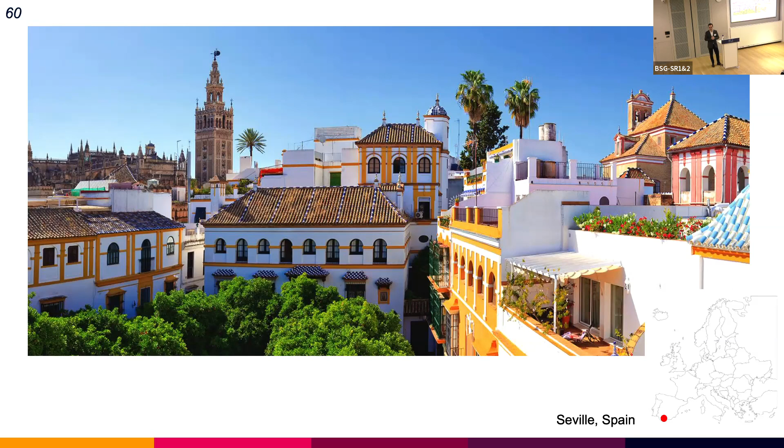I would like to start talking about where I come from, because I am from Seville, Spain, a lovely place with amazing food and fantastic weather, but with last summer reaching more than 45 degrees. I think we never saw that before. This is because the way that we understand cooling is changing.

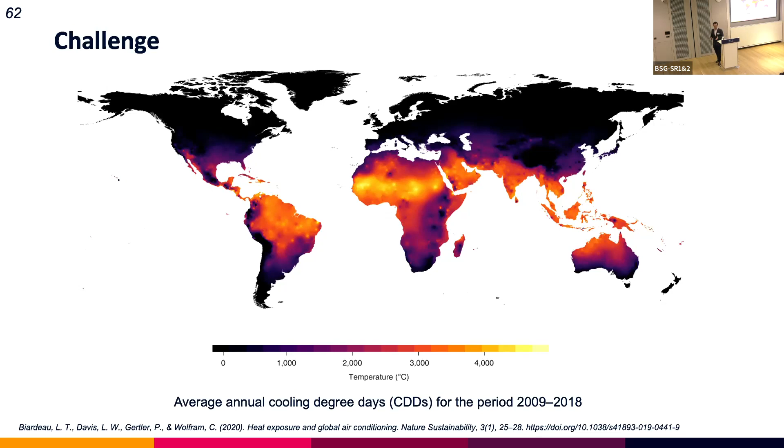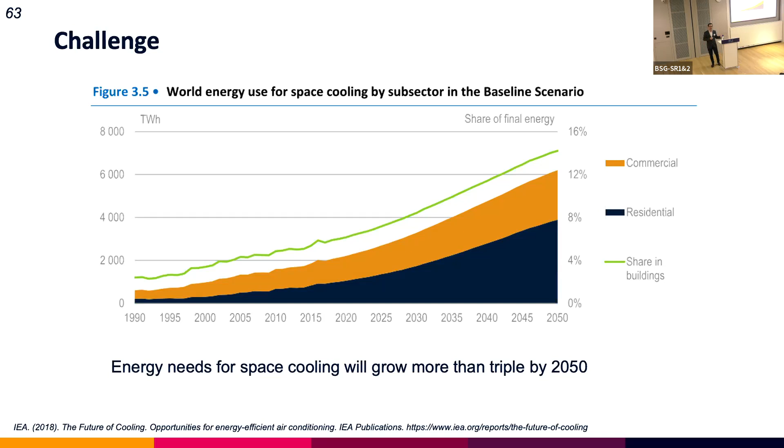Global warming is increasing temperatures globally, and heat events will occur more often and last longer. It's expected that the energy demand for cooling will grow by more than triple by 2050. Even in the UK, it's expected that more than 75% of households will have air conditioning in their houses by the end of the century. So to face this challenge, we need to start thinking about adaptation and not only about mitigation, in order to increase the heat resiliency capacity of our cities.

What is heat resiliency? We can define heat resiliency as the ability of buildings and the system to continue functioning as intended in the face of heat stress imposed by climate change.

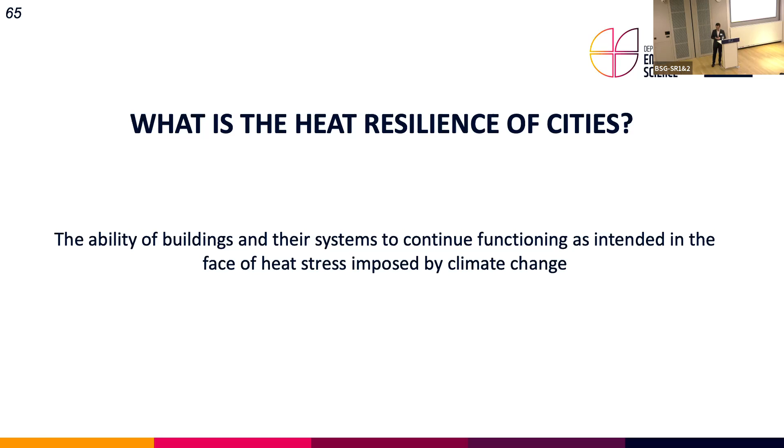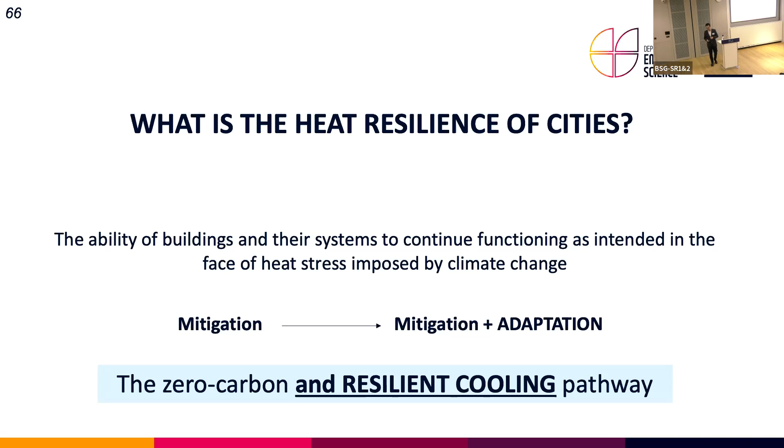In this case, we can find well-oriented policies focusing on energy efficiency and the net zero carbon pathway. But here we are not considering any adaptation pathway. Even most of the time, we are creating some barriers or trade-offs to promote this adaptation. So in this presentation, I will show the different steps that we should promote in current building regulation and building design in order to improve this adaptation pathway.

They are related to heat dissipation, heat modulation, and solar and heat prevention in the built environment. Let's start one by one.

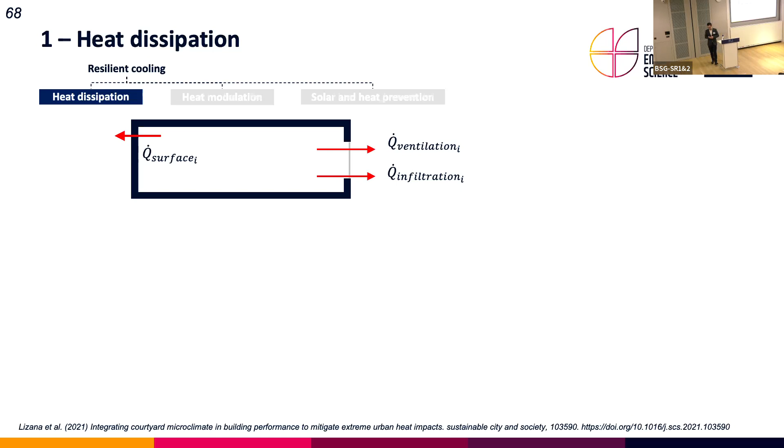Heat dissipation means the way in which we can reject heat from the indoor environment, from inside to outside. This is something we can do through the building surface, through ventilation, or through air infiltration. Right now, current policies are focusing on energy, assuming that in all buildings we have ventilation and a heating, ventilation, and air conditioning system.

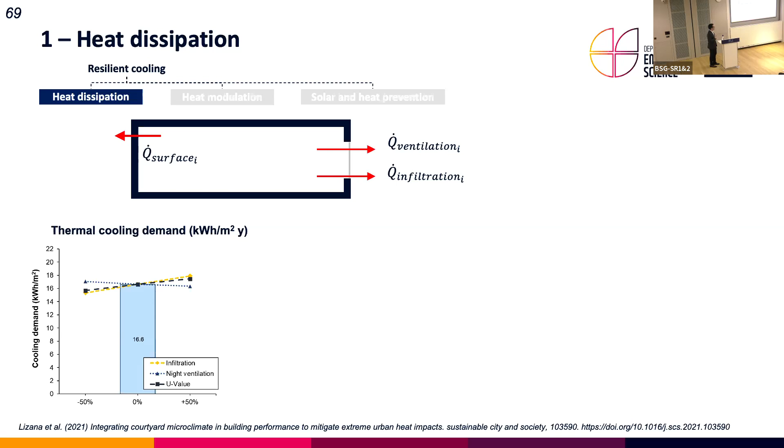From the energy point of view, when we evaluate these solutions to reduce infiltration and improve the insulation of the building, we are decreasing the energy demand, in this case for cooling, which is fair.

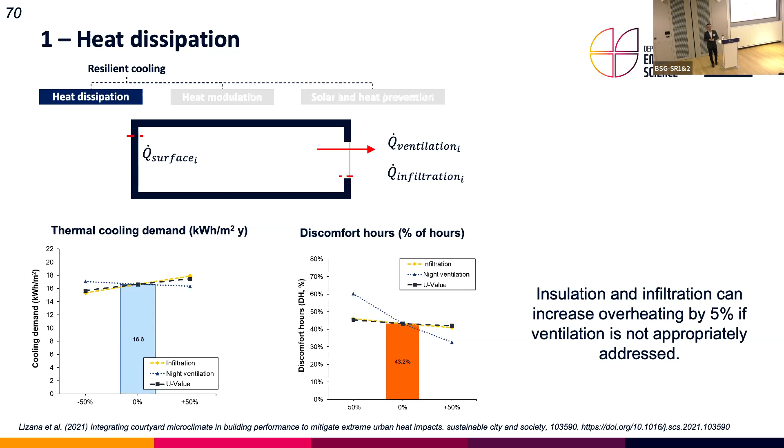However, when we evaluate the same solutions from the point of view of discomfort, in cases where we don't have air conditioning, we can see the same solutions increasing the discomfort hours. Discomfort hours meaning the percentage of time in which our building has a temperature above a threshold, for example above 27 degrees. So by promoting insulation and infiltration control and not promoting ventilation, we are increasing overheating in our buildings by up to 5%. Of course, ventilation is an option we can promote to solve this problem.

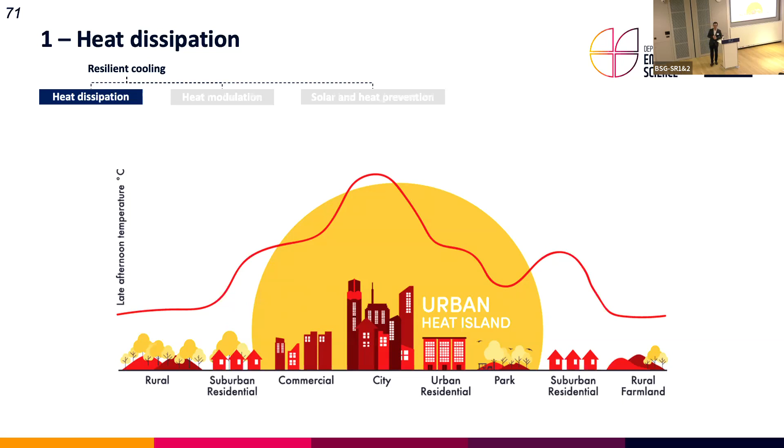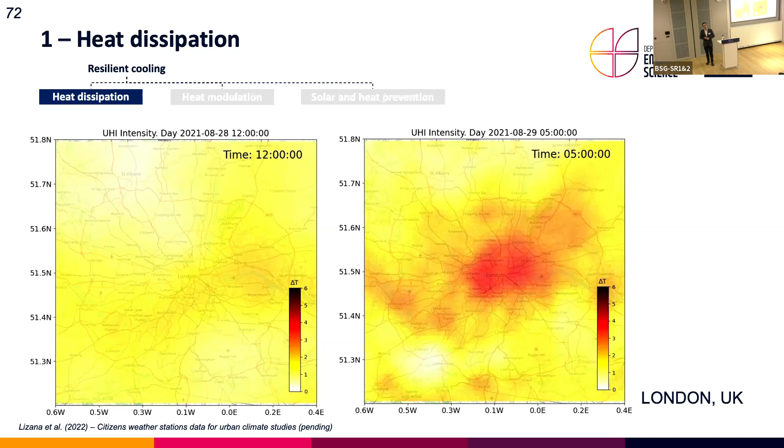But then we find another problem: the urban heat island. This is related to the higher temperatures we find in some areas inside the city compared with the rural surrounding areas. This is an example of London last summer, where we can see that during daytime the temperature perturbation is minimal, below 1 or 2 degrees. But as soon as we arrive at night, we can find up to 4, even 5 degrees of temperature difference between some areas in the city and outside.

So in this figure, we show a well-designed building, well-balanced from the point of view of indoor and outdoor temperature. With current policies promoting energy efficient buildings and not addressing ventilation, we are overheating our buildings by up to 5%. And with the problem of the urban heat island, where we cannot cool down cities in some areas, we are making all buildings more overheated.

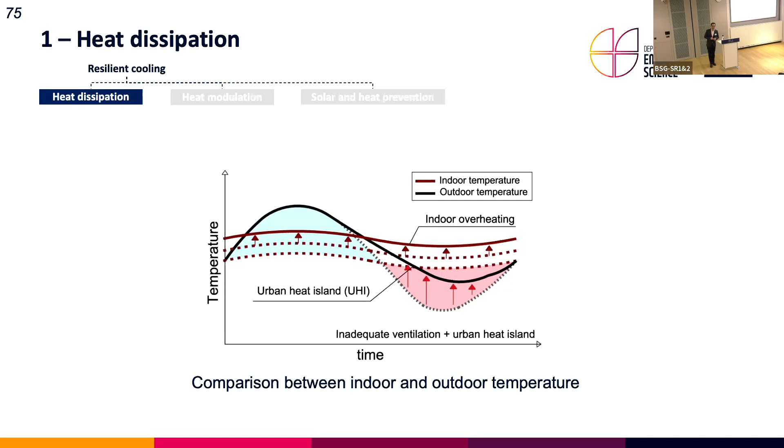This is something we are working on right now, a tool we can apply to map any city in the world in order to identify these vulnerable areas and support decision making.

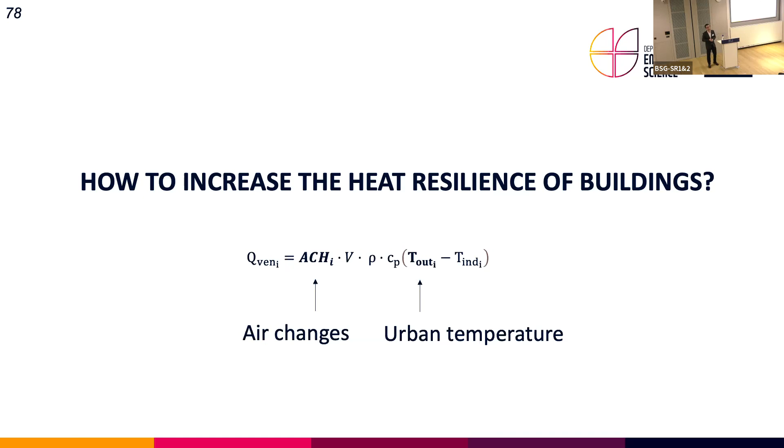The next question is: how can we increase the heat resiliency capacity of our buildings? To answer this, we have to go to the fundamentals: ventilation and urban temperature.

Right now, building regulations focus on ventilation for heating systems. We limit ventilation to the minimal requirements because ventilation increases the heating demand of our buildings. We define mechanical or hybrid ventilation systems to address this issue.

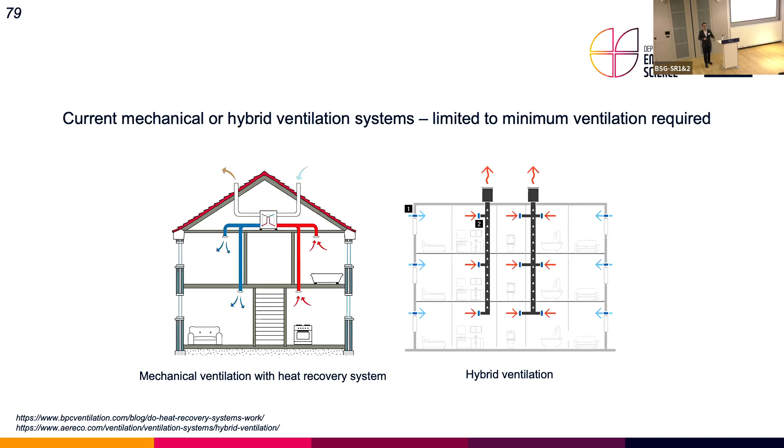We have forgotten a large portfolio of solutions to promote ventilation, which can be driven by wind, by solar, or by the stack effect, increasing the heat dissipation potential of our buildings.

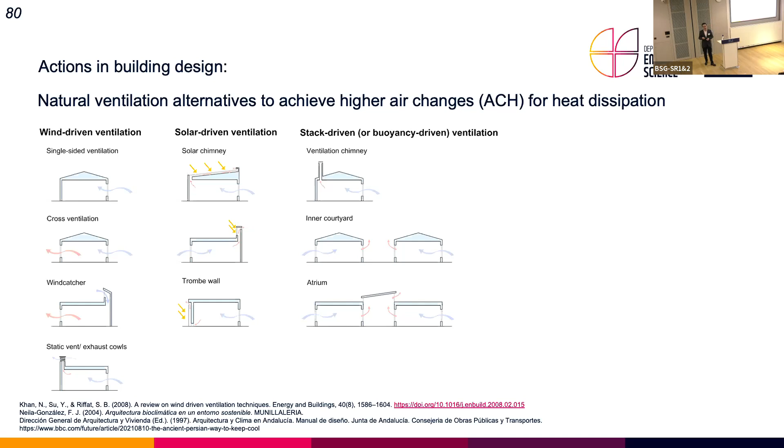These solutions are not new. We can learn from ancient or vernacular architecture, such as the wind catchers of Iran, the ancient Persian way to cool the environment by capturing prevailing winds and introducing them inside buildings.

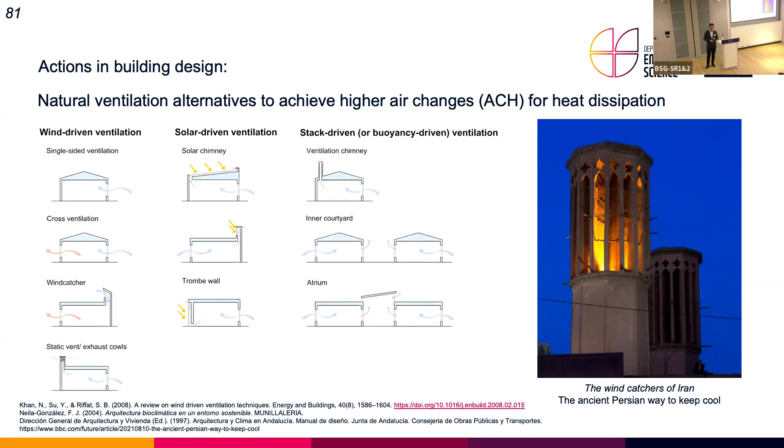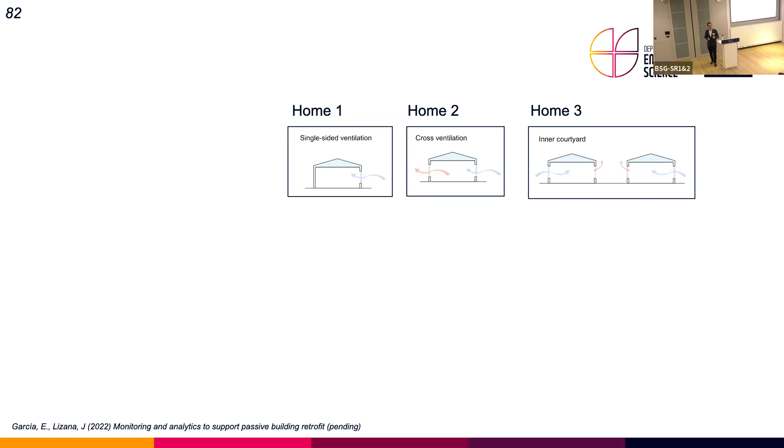In this study, we compared the average ventilation rate during a whole summer season across a house with single-side ventilation, another with cross ventilation, and another with an inner courtyard promoting heat dissipation through cross ventilation and the stack effect. We used the CO2-based decay method to measure average ventilation rate over the complete summer season.

We saw the data distribution of all ventilation rate values during this summer season, and found that by promoting an appropriate building design, we can increase the heat dissipation potential of our building by more than double.

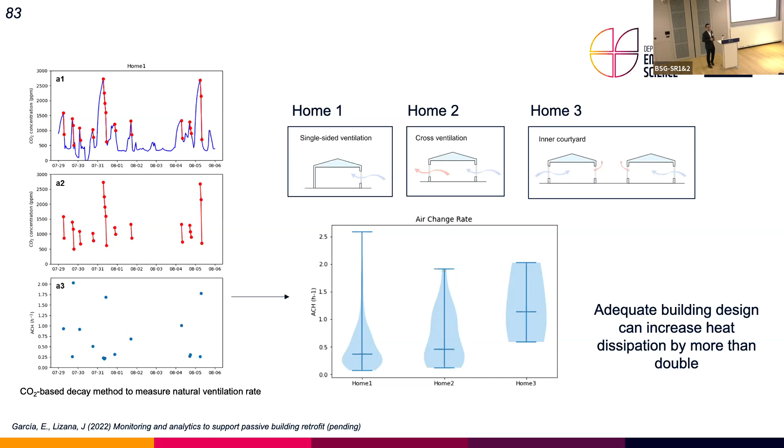Then we need to identify ways to reduce urban temperature. Here we need to start thinking of urban planning that is less car-centric. The solution is simple: we need to modify the land surface, promoting nature-based or artificial solutions to implement shade, evaporative cooling, and solar reflection.

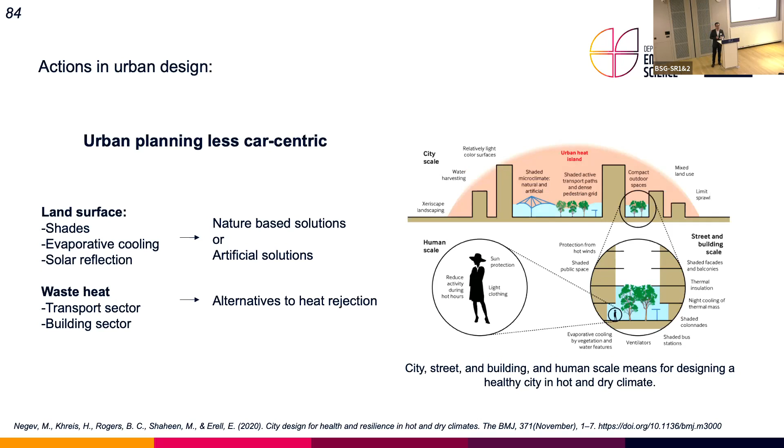From the point of view of waste heat, we need to find alternatives for heat rejection in the transport and building sectors.

A successful case is the city of Barcelona with its superblocks model, moving beyond car-centric urban planning toward a pedestrian-centric model, limiting traffic to the edges of the superblocks and promoting strategies related to land surface modification and waste heat, along with better public transport to support this city configuration.

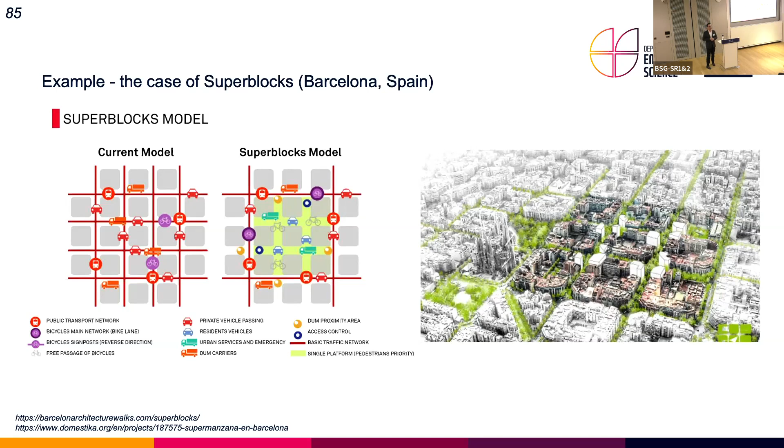The second powerful strategy is heat modulation. This means using the building's thermal mass to further increase the potential for heat dissipation, absorbing heat gains and rejecting them at night when we have free cooling.

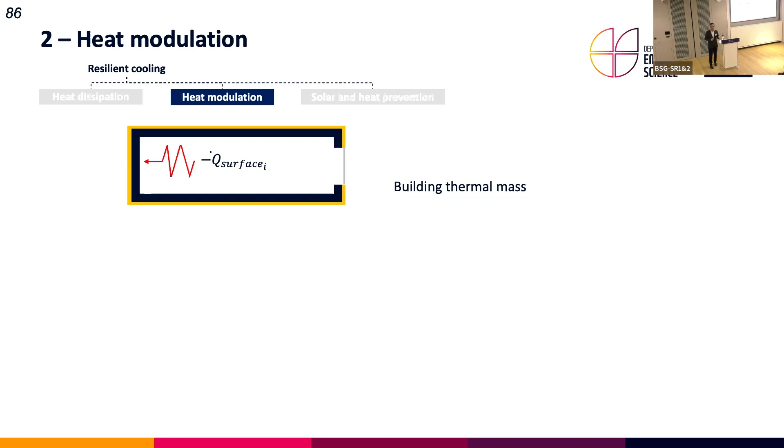In this study, we evaluated how to increase the potential of heat modulation even further by implementing phase change materials, in order to increase the thermal energy storage capacity of our building.

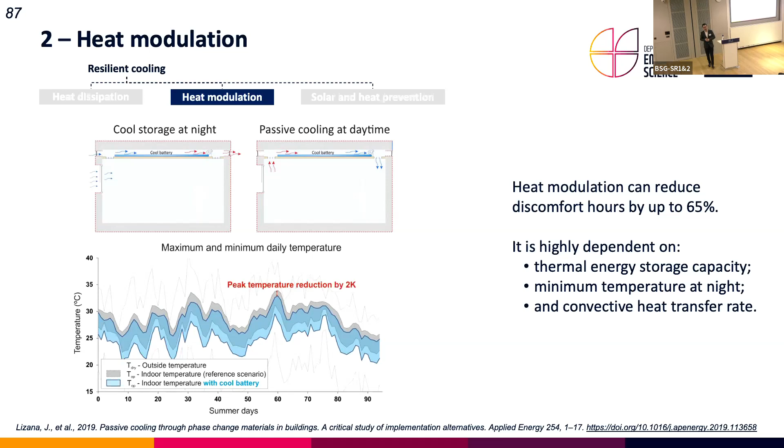We evaluated implementing this material to increase the thermal energy storage capacity of our building as a cool battery, storing coolness at night for passive cooling during daytime by absorbing heat gains. We were able to reduce peak temperature by up to 2 degrees and reduce discomfort hours by up to 65%, combining heat dissipation and heat modulation.

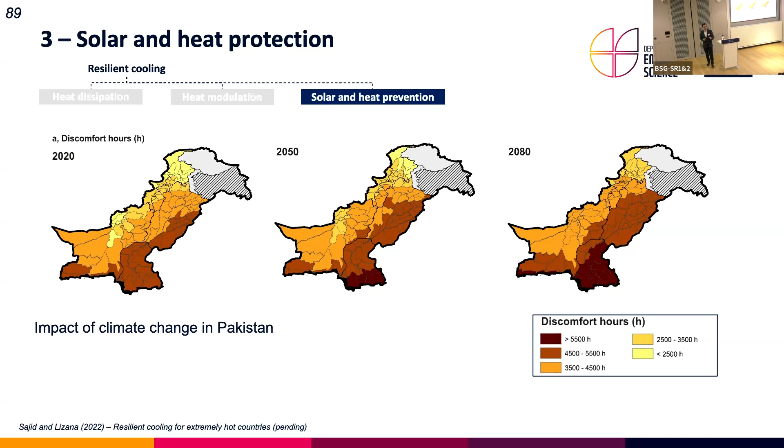Finally, the last best alternative is solar protection. This is really important in extremely hot countries such as India or Pakistan, where indoor environments can be in discomfort more than 50% of the time.

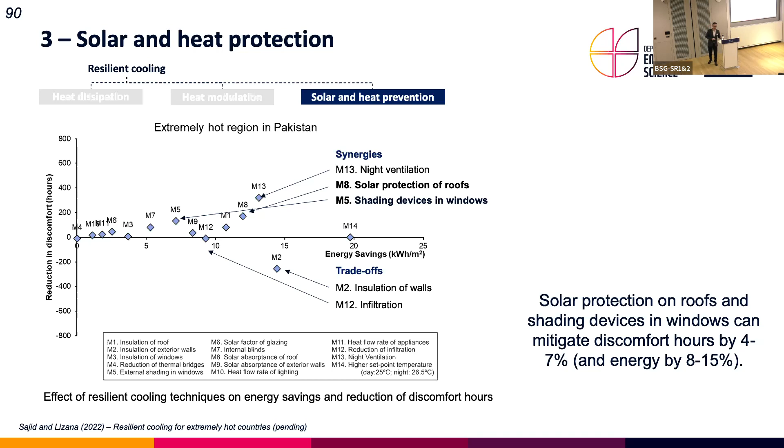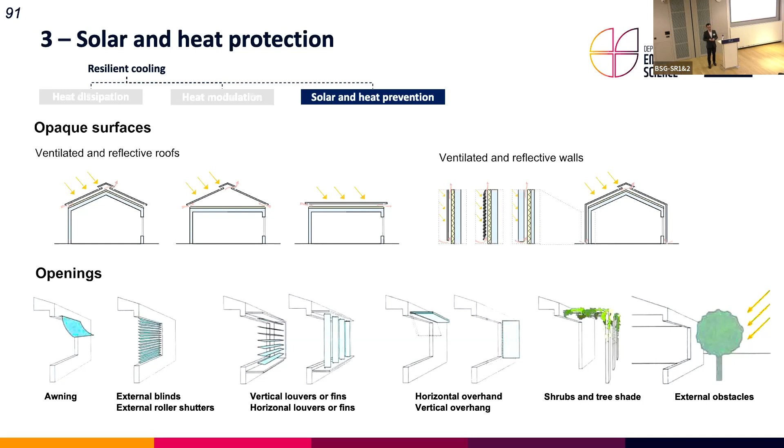Here again, we have a large portfolio of solutions. This is not something new. We can reduce the solar gains in the opaque surfaces, promoting ventilated roofs or ventilated walls, and implementing reflective materials. And from the point of view of openings, it's the same. Solutions are in the market, so this is not something new. And again, it's something we can learn from ancient architecture, because the roof of the white villages in Spain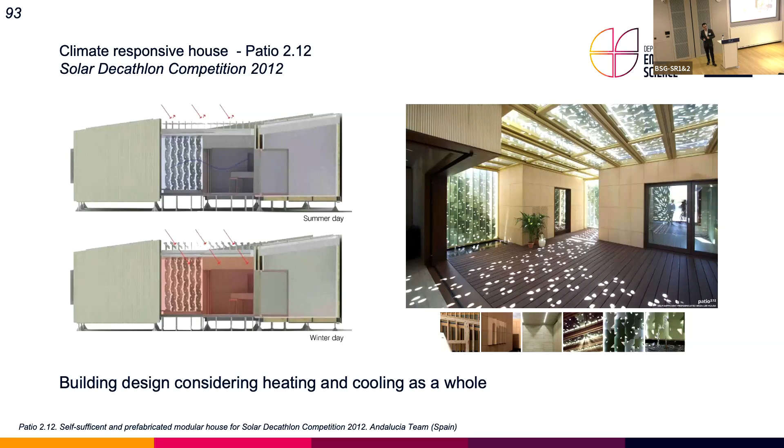is not to promote tourists, it's to be protected from the sun. The two most important things I would like to transmit today is that we can implement all these cool criteria, considering in building design, heating and cooling as a whole. This is one example we did for the Solar Decathlon competition: this passive house, this climate responsive house, in which we were able to design the inner courtyard to promote ventilation, promote heat dissipation, and be protected from the sun. In winter, we were able to use the same concept to absorb solar gains as a greenhouse,

in order to reduce heating needs. The last and most important thing I would like to transmit today is that all these cool strategies require a long-term plan. Next summer, we will find some heat events, and the fastest and easiest response is to buy an air conditioner the day after. We need to start thinking that to implement all these cool strategies, we need to start now, step by step, because they require time and effort. And it's only then that we need to start thinking about implementing the best available technology for cooling.

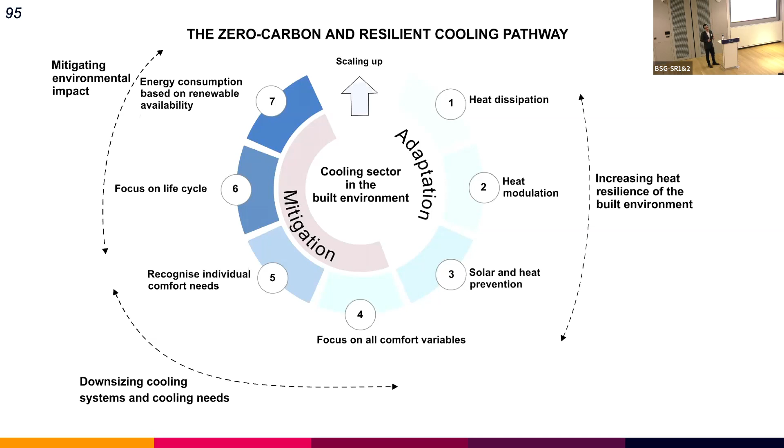Here we have additional alternatives that we can implement in building regulation and building design, in order to reduce the size of the system, reduce even more the cooling needs, and mitigate even more the environmental impact. Because comfort is not only temperature, and because the environmental impact of cooling is not only in the operational phase. But this is something you will only know if you start following our updates on our social media profiles. Thank you very much.

Thanks very much. Architects always have the best pictures, and you've proved that yet again. Although, I don't know, Charlie, maybe you've got something up your sleeve. Okay, so thanks, Charlie.

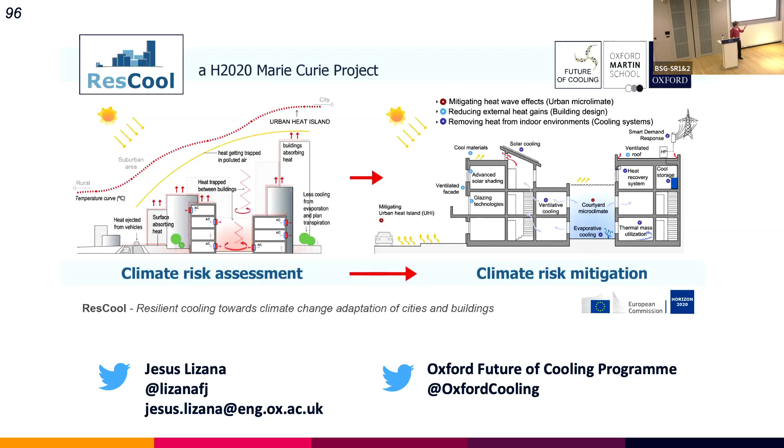Yeah, so I'm going to talk about... Oh, am I going the wrong way? Oh, there we go. Yes, so I'm going to talk about digitalization.

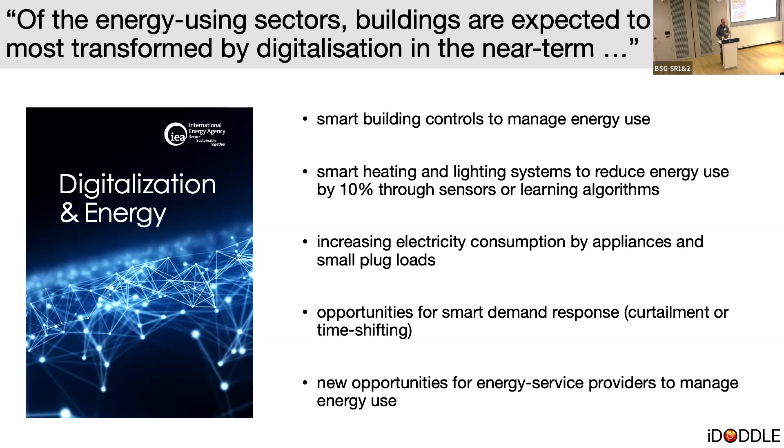I was listening to Jesus talking, thinking, wow, there's like no connection whatsoever. But actually, you very nicely talked about the engineering and design stage to get the buildings and the fabrics right. And then this piece is about, well, what do you then do once you've got the homes that you're living in? According to the IEA, the International Energy Agency, buildings is going to be the end-use sector most transformed by digitalization. This is smart building controls, smart heating, smart lighting, smart demand response. These are the sorts of things starting to appear in the domestic sector, with the potential to help manage and reduce energy demands and emissions.

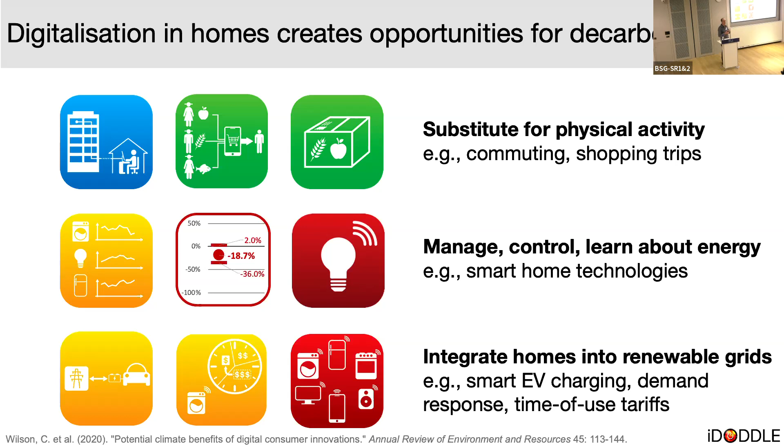In an earlier study last year, we looked at some of this - let me just toggle back and forwards between these two slides so you can see what's changing. That middle smart heating app is becoming a little graph showing a range of estimates from the literature about the energy and carbon savings from smart heating systems in various trials. If you look at the evidence across some of these other innovations, there's a lot of uncertainty depending on the study context, but a general picture where there are certainly opportunities for these digital applications to help reduce energy and emissions.

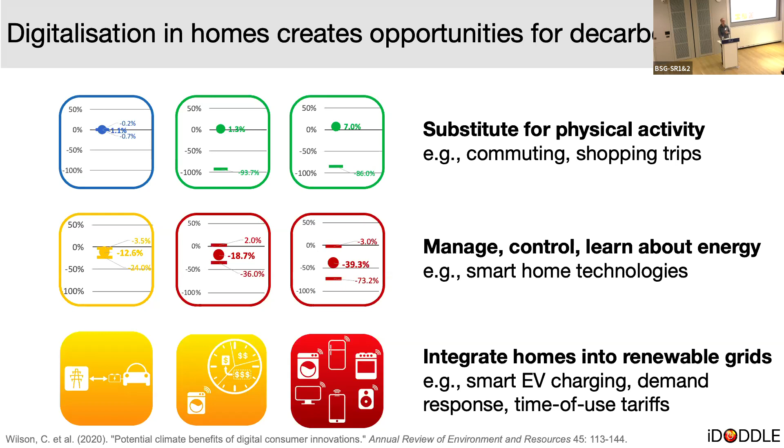When you're trying to work out the connection between digital services and energy and emissions, it's a complex picture. You have direct impacts: imagine your smart heating system—there's energy required to make the kit, energy required to run it, and energy required to get rid of it. Those boxes are colored red because they can make energy go up, a potentially bad effect.

From the use side, using that heating can have efficiency effects. Smart heating—some trials show you can reduce gas demand by 7 or 8% just by having a learning system which avoids heating being on when no one's at home. That's a beneficial effect, so it's green—energy can go down.

Substitution effects are less relevant for smart heating. But with other services like online retail, you might be substituting for driving to the shops, but then doing lots more retail because it's frictionless and easy.

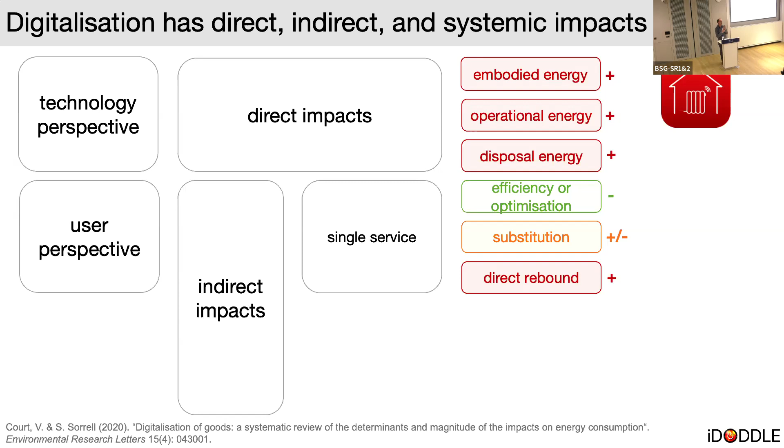Direct rebound effects are when you end up using more of that service because it's become cheaper or easier to use. So your smart heating system allows you to turn your heating on when you're away from home because you want to keep your pets warm, for example.

Where it gets really tricky is when you're looking at the systemic effects. Is the time, money, or effort you're saving because of the digital technology meaning you're doing a lot more of something else which is energy intensive? Or are the efficiencies or social changes in your domestic life causing aggregate growth in the economy or some other transformational change, which might be making energy go up or down?

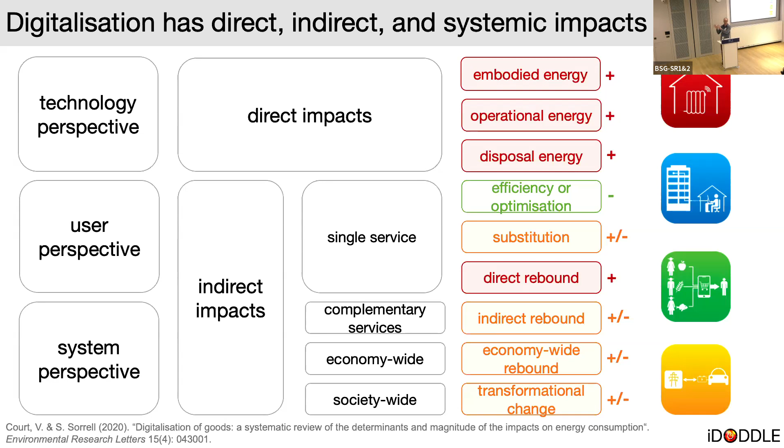Hence these bottom ones have this plus-minus complexity effect, which often aren't included when we're looking at energy impacts of digitalization. When you think about the sorts of apps I was talking about at the beginning, the picture gets quite complex trying to create a clear line of causality between introduction of the digital service and a definitive estimate of its impact on energy and emissions.

That's the empirical picture so far, and then some of the challenges around quantification. When you look at scenario studies which look forward, they tend to assume that digitalization has a beneficial or enabling role. This is a global energy demand scenario I was involved with—a global analogy to the UK positive energy future study that Nick Eyre was talking about this morning.

I went back to this study and looked at all the measures and strategies we were assuming from now to 2050 with respect to thermal comfort in homes. The main measures were: low carbon heat and cooling technologies, stringent efficiency standards, and a dramatic increase in retrofit rates. They affect energy demand either by reducing activity, shifting the structure of demand, or improving its intensity—its efficiency. In the right-hand columns is a simple traffic light coding saying whether these measures are dependent on, enabled by, or really independent of digitalization as a transformative force.

Simplistically, some of the low carbon heat technologies are certainly enabled by digitalization in terms of the control functionalities. Retrofit rates can also be enabled by digitalization, with greater use of data to work out where retrofit could be most effective or efficient. But the core one around improving efficiency standards is really a secular trend that needs to be accelerated, but isn't necessarily digital dependent.

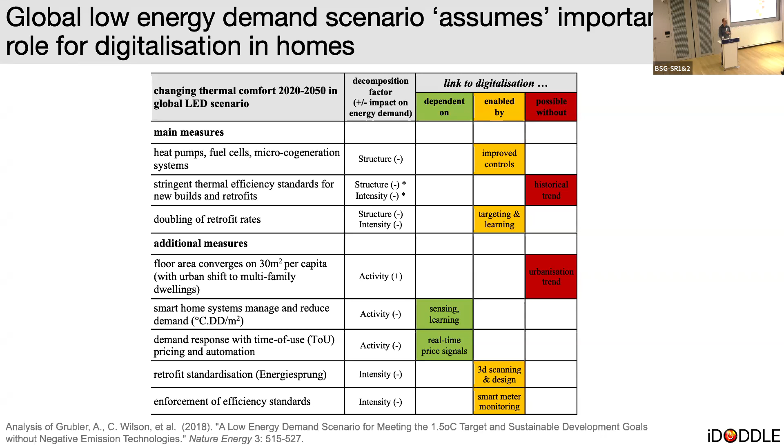Tina was talking about this Energiesprung model of standardized retrofit solutions, which is also enabled by digitalization. So if you look overall at this picture, focused on homes and heating and cooling, digitalization has a key enabling role for much of the future story about low energy demand. This is a Sankey diagram from a UK scenario study by National Grid.

This is one of their future energy scenarios. For those not familiar with Sankey diagrams, on the left you have all the energy resources extracted from nature, and the flows lead all the way to the right, showing where they end up. This represents 2050. The yellow is all electricity, and the light blue is all hydrogen. So if you look at homes, it's really fully electrified energy services with a little bit of hydrogen and a little bit of biofuel by 2050.

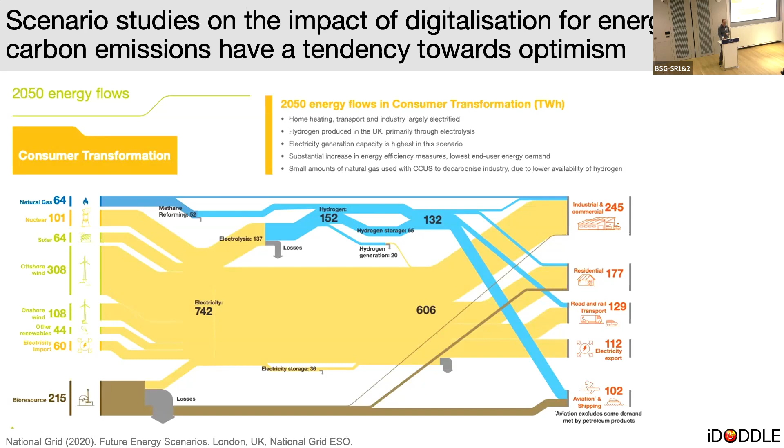The important thing is that in this scenario, if you look at the assumptions behind this National Grid study, here are some of them: 4/5 of UK homes smart charge their EVs, and over half of that proportion actively provide storage and flexibility services back to the grid. That's the sort of imagined future.

I'm going to come back to this issue of agency and control, framing it in terms of where control and agency around domestic services lies. Around a third of UK homes are actively managing their heat demand, and roughly the same number have heat pump systems which can essentially arbitrage between hydrogen and electricity. So there's increasing technological sophistication, but also quite a distinct role for end users in a domestic context.

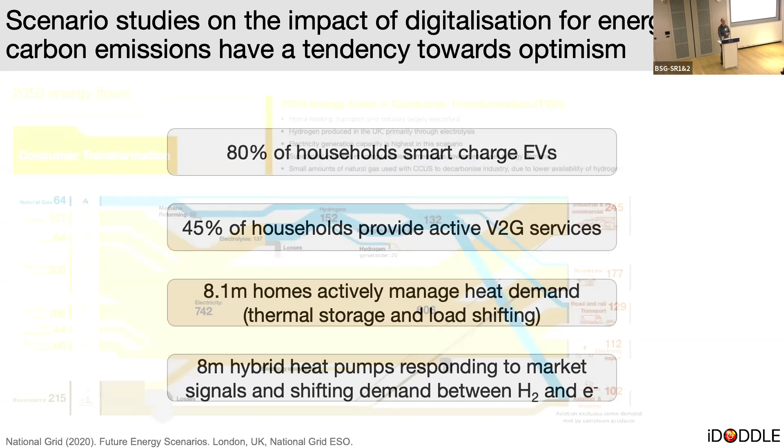This is an example of how scenario studies looking forward can be quite bullish or optimistic about both technological and user assumptions. But when it comes to the specifics of how they imagine agency and users, they tend to make quite coarse assumptions. This is a nice diagram from a recent study by colleagues at the University of Sussex, part of the CREDS Centre, who took 8 different scenario studies represented as blobs and characterized them on these spectrums.

The top spectrum shows how these scenario studies frame the business models delivering digitalization into homes. On the left it's controlled by big tech companies, and on the right you've got more of a digital commons, public ownership model. Just so you're aware, that red cross on the right is the global low energy demand study I talked about a moment ago.

On the bottom, you've got the spectrum between where agency lies: is it essentially fully automated systems with users marginalized, or users with full agency and control on the right-hand side? Again, you see this spread in how scenarios capture this, but generally in quite a coarse and simplifying way.

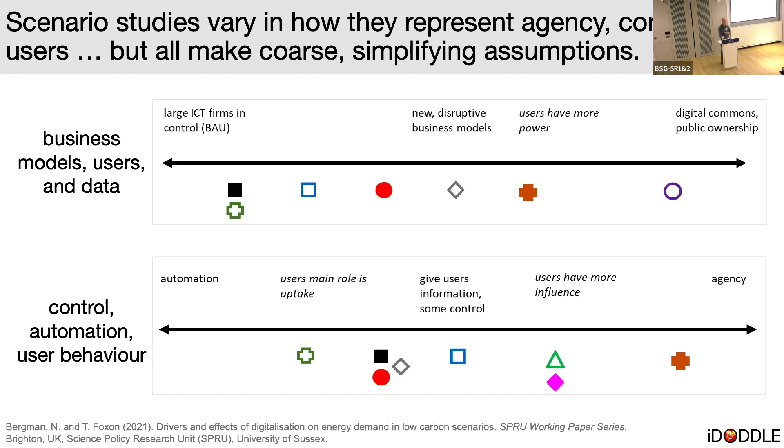So the last thing I wanted to say is to go back—we've gone on this journey from the digital opportunities through the empirical evidence about their energy and carbon impacts, through to these scenario studies that make optimistic assumptions for the future. The point I'm trying to make is that where agency and control lies will prove to be critical.

To bring it back to some empirical work, this was a study from a few years ago that a colleague, Tom Hargreaves, and I were involved in—a field trial of smart home technology, smart heating systems and smart home systems. We found that learning and control was critical for explaining whether these technologies successfully get domesticated. Domestication is the idea that you can adopt a technology, install a smart heating system, but then the real interest begins to see whether it becomes part of your domestic life—does it get adapted, appropriated and assimilated into domestic life, or does it get rejected for some reason?

We found three very different types of control. The first we called artefactual control—the control of a device or piece of hardware. In this sketch with users, smart home technologies and domestic life, the dark arrows represent the trying out, experimenting process—describing how users get to play around with how these smart home technologies can help them in domestic life. The blue arrows are the feedback, the learning and experiential feedback. So we try out, we experiment, we play, and then we learn whether these smart home technologies actually help us in domestic life.

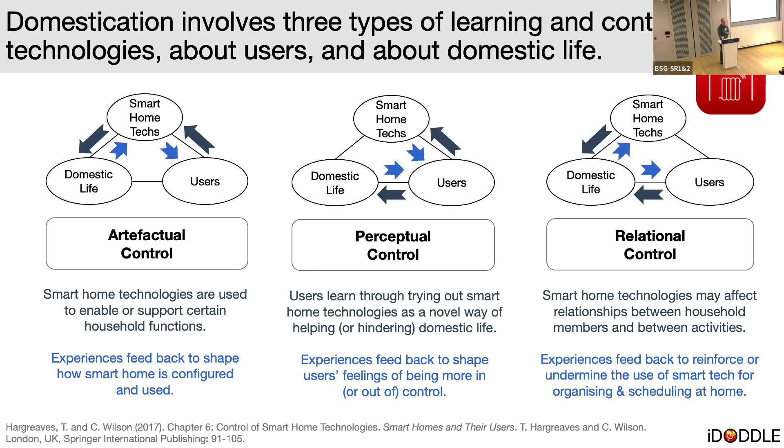And so over the course of the 1.5-year trial, we saw smart home technologies—these smart heat systems and other smart home systems—get more and more embedded into the routines and rhythms of those households, with the energy management benefits which the empirical data I showed earlier can promise.

Conversely, you have stories of interaction between these types of control where you struggle to know or learn how to use the devices, maybe the hardware is poorly installed. We found cases where the use of the technologies was very much dominated by whoever the tech-savvy household member was, which caused disruptions to household relationships. This poor relational control fed back to household members feeling really out of control as a result of all this control, which then undermines the use case and so on.

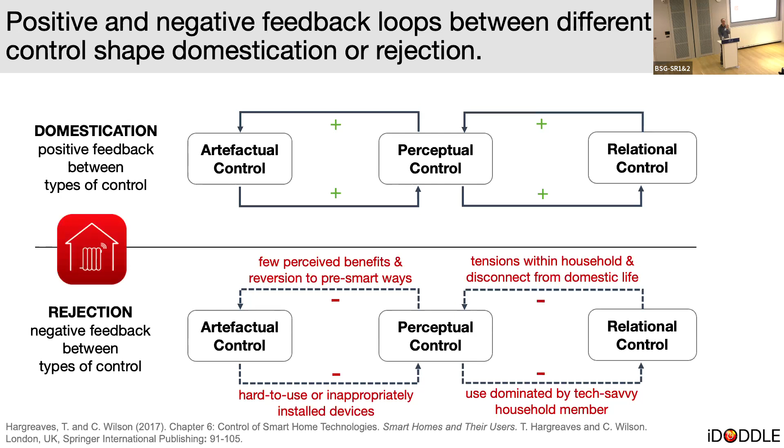And this, in some cases, led to the technologies being rejected wholesale. So some very in-depth household-level stories about how control is so important to whether the variety of digital applications and services I talked about at the beginning could actually become mainstream parts of domestic life, certainly in the near term.

Where will control and agency lie? Will we move towards much greater automation with agency sort of up in the cloud or at the system operator level, or will we move towards very distributed forms of agency that might compromise overall system efficiency, but might be more comfortable for the households? So with that, I'll stop. Thank you.

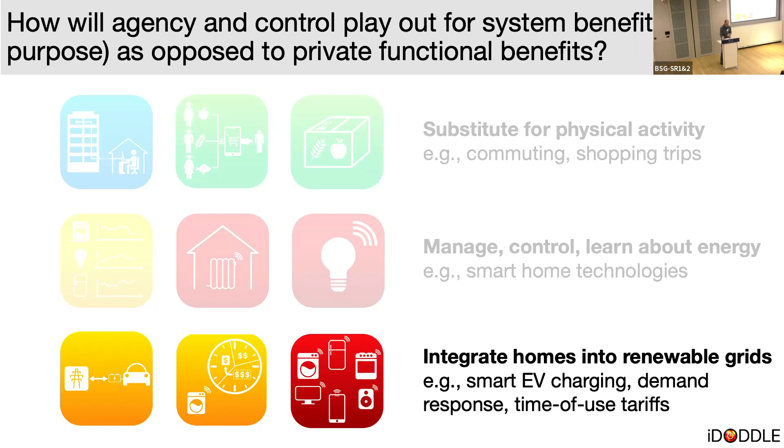Okay, so I've got a question for Charlie, particularly about the bottom row and the impact around these large-scale digitization services. How well do you think we actually understand the offsetting that happens? We talk about using these services to lower our individual energy consumption and impact, but isn't there a danger we're just offsetting our own personal use to the energy consumption of the information infrastructure elsewhere? Because we really don't understand that at the moment—how much consumption the telecoms networks, data centers and everything else that become an integral part really should be attributed back to us in terms of our overall consumption.

Yeah, so okay, well maybe I've got more of an optimistic reading of the literature and the data on this than you have. Maybe two points to make: firstly, the energy footprint of data infrastructure as a whole—this is according to a study in Science by Masanet et al.

From last year, demand has been more or less flat, despite almost exponential demand in compute instances in the data infrastructure, because of both huge efficiency gains and scale economies in the big server farms and so on. So they told quite an optimistic story about the ability of efficiency improvements to continue offsetting the scale effects so that overall demand stays relatively flat.